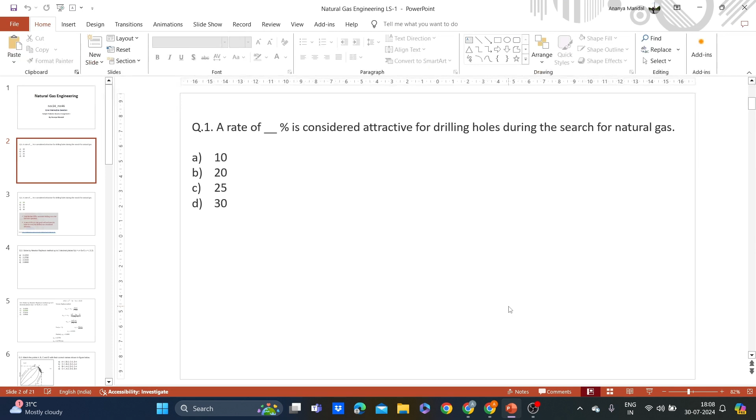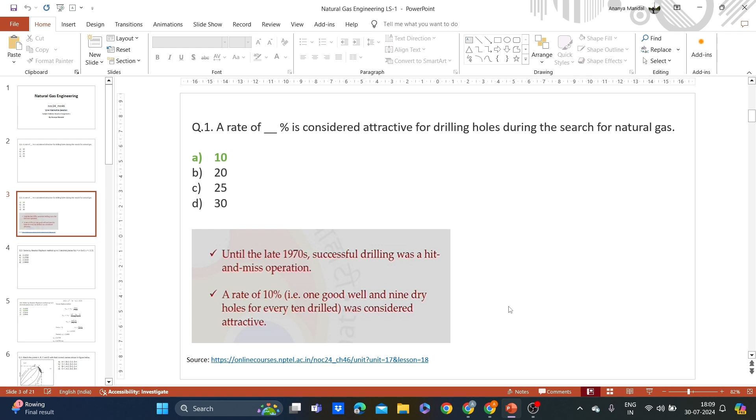So we are only considering what will be the basis for which we will consider this, okay, we can explore more. According to that explanation, the answer will be 10% because until the late 1970s, successful drilling was a hit and miss operation. That's why a rate of 10%, that is one good well and 9 dry holes for every 10 drilled, was considered attractive. So the rate percentage means how many wells are dug, and according to that, how many of those wells you get your oil from. That is what is called the rate which is considered attractive for drilling holes during the search for natural gas. So that was what this question meant. Okay, so the answer here will be 10%.

That also, sir, I took that answer from sir's notes only. So here the answer is 10%.

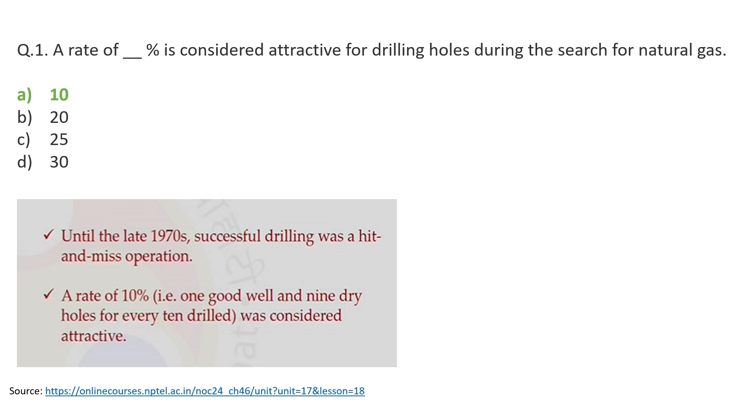So the function given to us is fx equal to x cube minus 3x minus 5, and x is between 2 and 3. The Newton-Raphson method equation says that the next iteration xn plus 1 will be equal to xn minus fxn divided by f dash xn, where f dash xn is the differentiation of the function fx, the first differentiation.

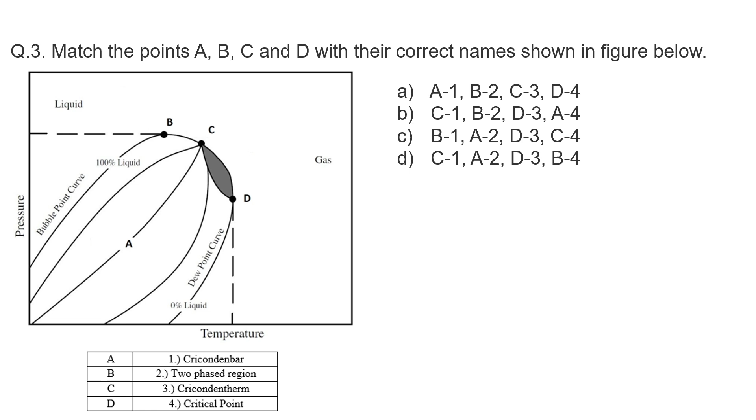Okay, sir has taught this graph for finding what kind of reservoir it is, whether it has gas or oil or condensate. That all depends on this graph, which is a pressure temperature graph for multi components. So here, to know what all these points are known as, we need to know a few definitions, a few terminologies which are important for understanding this graph.

So first is the bubble point line. The bubble point line is the point at which the first bubble of gas comes out of the liquid. Okay, so here you can see the bubble point curve. So any point you take on this curve, at that certain pressure, that is the temperature at which the first bubble of gas is formed out of liquid.

Whereas second is the dew point line, which is the point at which the first drop of liquid drops out of the gas. So this is the dew point curve. Here, at certain pressure, the temperature that we will get is the dew point temperature, and at that temperature, the first drop of liquid forms out of the gas.

Now comes the critical point. This is considered the critical point, which represents the condition where the properties of the liquid and gas are identical, and it is also said that above the critical point, a liquid and gas can never coexist.

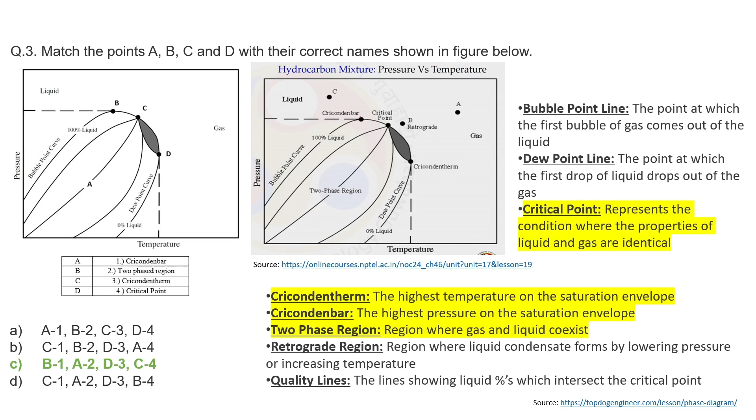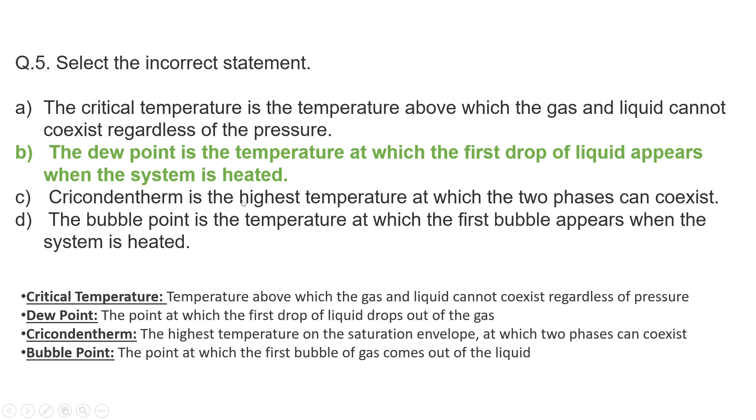So for gases to form into liquid, we have to condense it, and condensation happens when the temperature is lower. If you heat something, it will go from liquid to gas. But if you decrease the temperature, it will go from gas to liquid. That's what happens at the dew point: the gas turns into liquid, and the first drop of liquid forming is known as the dew point. So here the system has to be cooled, then only we will get the dew point. That is the point which is incorrect in this statement, and all the other statements are correct.

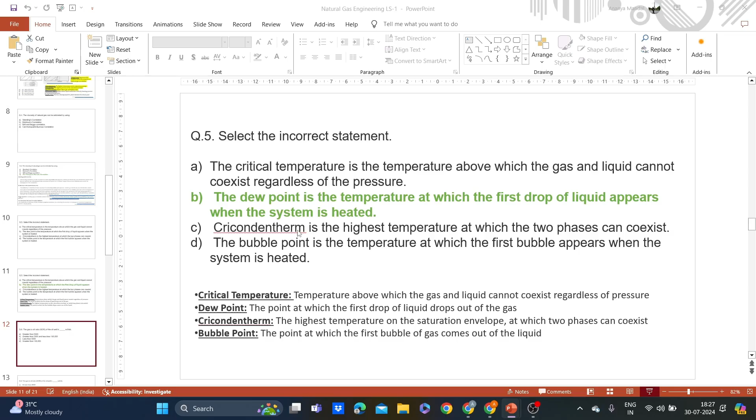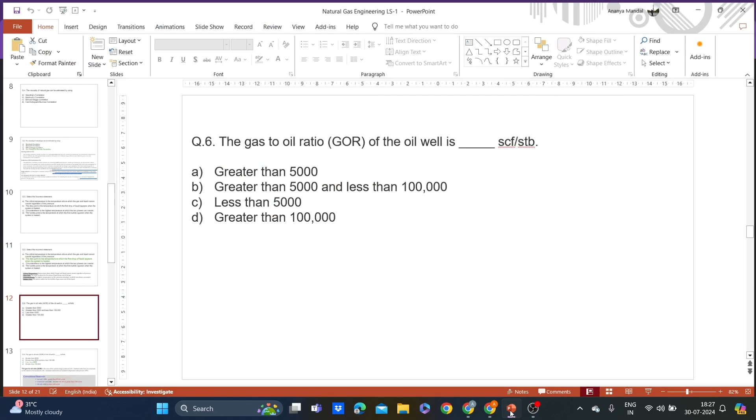So the next question is: the gas to oil ratio of the oil well is, and the unit is SCF by STB. Sir has taught this in his lecture, so can you answer this question? Okay, so Abdul, this is the next question. The gas to oil ratio of the oil well is. This was taught in sir's class and in the lectures also. So can you give me an answer for this question?

It's okay, Abdul. Can you see the screen now? This question. Do you know about gas to oil ratio? Okay, maybe there is a network problem. So I will define it. I will tell about it.

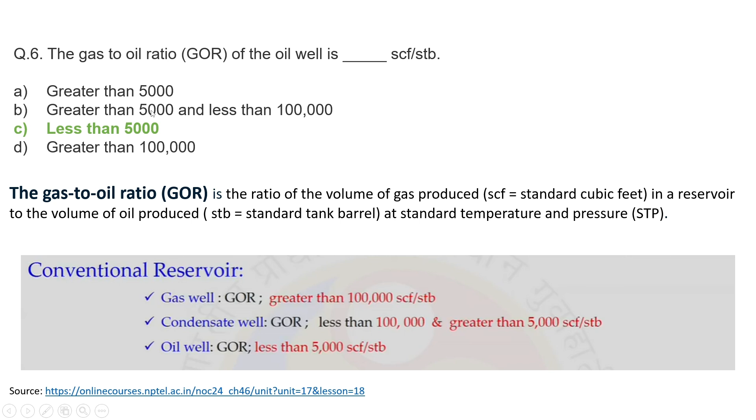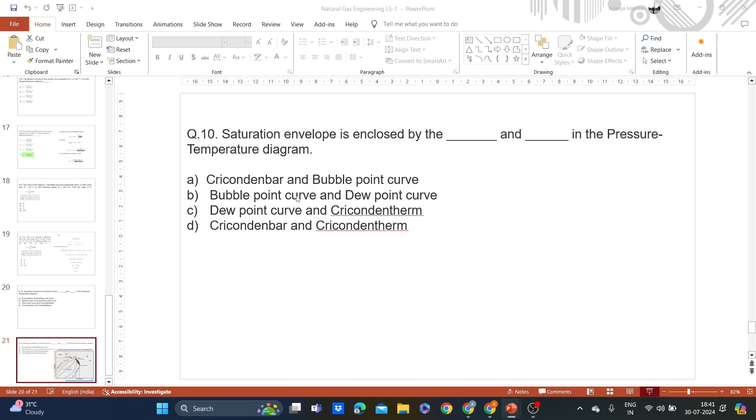Okay. So you have to understand in the question whether they are asking about certain points or the region. What you answered would be correct if they asked what are the extreme points of the saturation envelope. But if they ask what is enclosing the saturation envelope, then we have to talk about the curves which are closing this envelope, that is the bubble point curve and dew point curve. Okay. I hope I am clear. Did you understand that one, Abdul?

Okay. So do you have any of your own doubts from class or from the current assignment? You can ask those also because my sample problems are over. This was the last question. Have you done assignment one yet? Okay, you haven't seen the video classes.

What is your course? Like, what are you doing? You are doing BTech? Yes, ma'am. I'm doing B.Tech Chemical Engineering. Chemical engineering. From where? Chennai, Saveetha Engineering College. Where is it? In Tamil Nadu, Chennai. Okay. So I am actually also from chemical engineering. Okay, ma'am. So you haven't started the video lectures from sir, right? Yes, ma'am. So why did you take this course? What was your motivation? In chemical engineering, as much as I know, petroleum is not taught. I take more than four courses in NPTEL, ma'am. Okay.